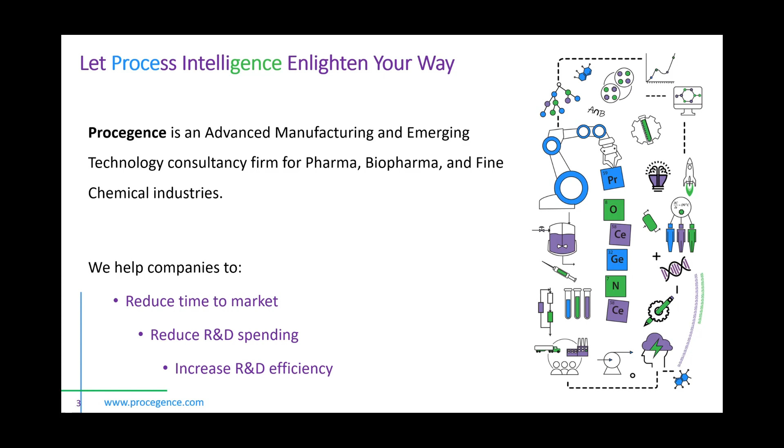We have done many projects, many scales, many types of clients - drug substance, drug product, biologic, small molecule, fine chemical, devices. So spray drying, crystallization, flow chemistry, process development devices - many different types of projects.

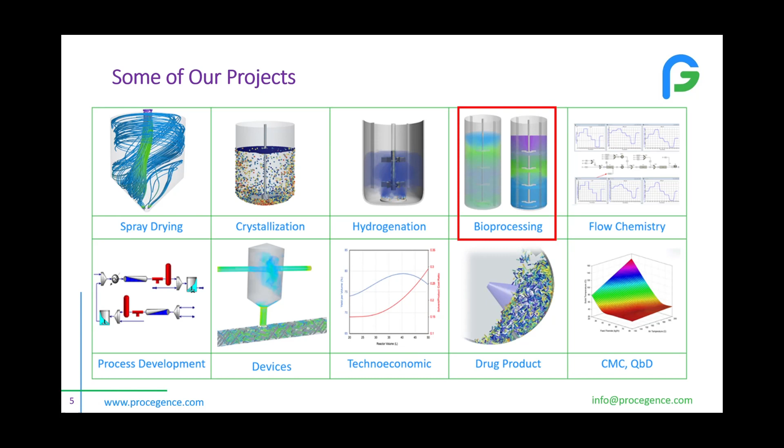If you are interested, you can refer to our website or our LinkedIn page, or email us directly at info@prostagence.com, so we can set up a quick meeting and show you how we work and how we could help you with your projects. For the purpose of this webinar, I'm focusing on bioprocessing and showing you the scale up of this bioprocessing equipment from the lab scale to very large scale manufacturing in a very rapid way.

What are the multiphase gas solid liquid reactors? What are the types and applications? In bioprocessing, we have fermentation, for example, in biopharma, wastewater treatments. In chemical synthesis, there are hydrogenation, ozonolysis, petroleum and refineries, fluid catalytic cracking, Fischer-Tropsch reaction, or in the food industry. So these types of reactors are everywhere at different sizes and designs and applications.

However, they are very complex, so the transport phenomena - heat, mass, and momentum or mixing - are scale dependent. So we have a gas bubble. In the bioreactor, the gas would be air or oxygen. In hydrogenation, it could be like hydrogen gas. We have a liquid medium, which in bioprocessing would be the bioreactor medium, or in chemical synthesis like hydrogenation, it could be methanol or the solvent we are using for the hydrogenation reaction. We would have the solid, such as cells or the catalyst for the hydrogenation, where we would have mass transfer and heat transfer.

For example, here you can see some examples of oxygen transfer from the gas bubbles. It's a flux from the surface area of the gas bubble to the liquid, and diffusing through the liquid, going to the solid. If it is going to be a cell, diffusing through the cell, going inside the cell, doing all the metabolic activity of the cells, and then secreting the product or the CO2, which then should be stripped away by the gas bubbles out to the environment.

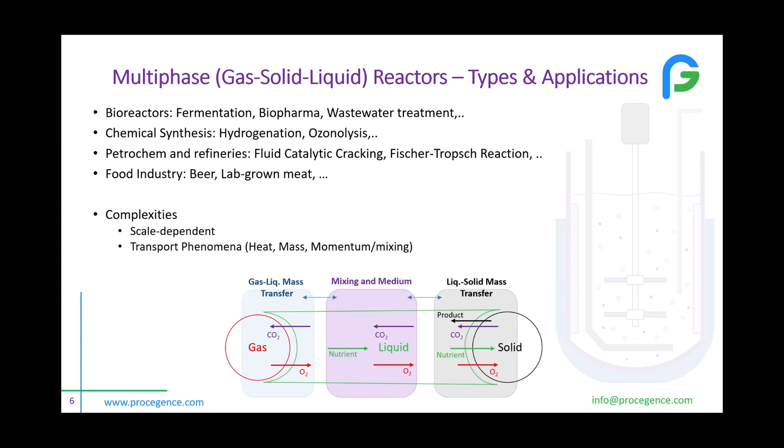As an example of the components for the bioreactor or the hydrogenator, these are typical lab scale, pilot plant, or manufacturing scale reactors. We would have the vessel, the container, which could be of different sizes, geometries and designs. We might have different baffles of different sizes and locations.

The mixing elements could again be different sizes, numbers, angles, types. We would have some probes for pH, temperature, concentration, and different PATs that we need in the system to control and monitor the bioreactor or hydrogenator reactors.

Gas supply, mostly through a sparger. The sparger would have different types of designs. It could be a star shape, a ring, or perforated plates. Every vendor has their own design, with different advantages and disadvantages.

Heat transfer, through a thermal coil inside the reactor, or a thermal jacket on the outer layer of the reactor.

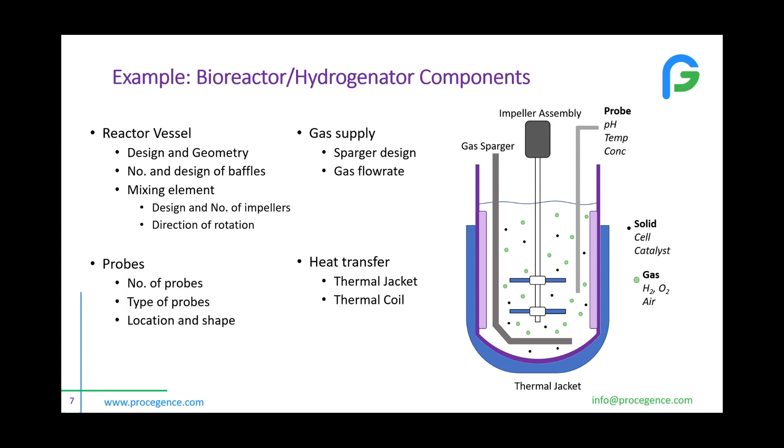The continuum of knowledge we need to have from the lab to manufacturing is always working hand in hand with the scientist, operator, and technician from the lab, and the biologist and chemist, all the way to manufacturing, to the engineers, to the management. We are working together on capturing all the knowledge from the chemistry, from the biology, to the equipment, to the plant and the process in one synchronized way.

The parameter estimation, or the knowledge of the chemistry or biology, was mostly defined by the chemist and the biologist. We would have some validation and get some parameters from the lab scale. For example, how would the cell behavior be at different shear rates, or the metabolic cycle for the cells in the lab scale.

Then we go for a scale up. This is mostly our work, shown here as the process between the lab scale and the optimized process, so we can design and have some parametric study to find the best scale and condition that we should run for an optimized space.

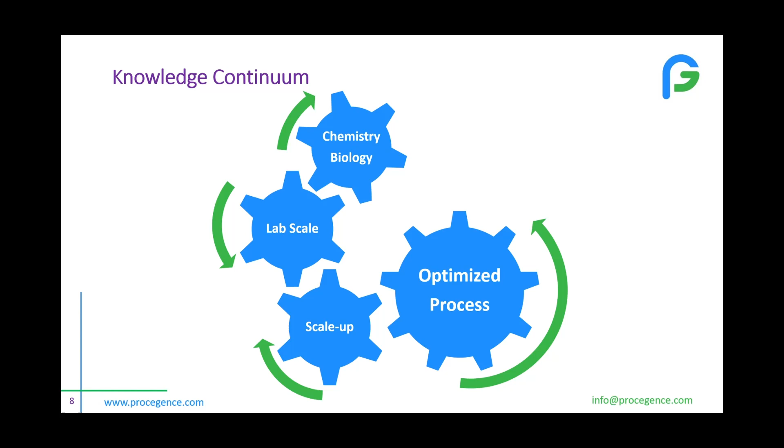In terms of scale-up challenges, most of the time the equipment, depending on manufacturing or the plants, is very costly and time-consuming. When we sit at the lab scale, we are working with 100 milliliter up to 1 liter, 20 liter bioreactors. Here you can see small vials all the way to these rocking chair kind of bags.

The processes are long, mostly like 3 weeks. Operation cost is still manageable because we are running at a very small scale. We have multiple options for different designs and equipment, so we can change the shape of the flasks or the impeller - in the lab scale it's still affordable to do.

However, when we go to manufacturing, now we are talking about 20,000 or 200,000 liter bioreactors. The time is still the same because it's independent of scale, defined by the cell behavior, but the operation cost is hugely different. We have this huge bioreactor which needs a lot of media, GMP time,

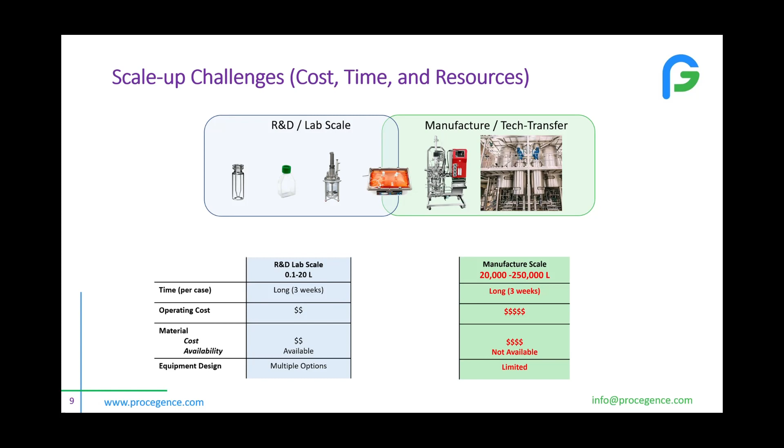utilities, everything that makes this process very very expensive. And most of the time the equipment is fixed, right? There's existing equipment that we have to retrofit our new chemistry or new biology into, so we don't have much availability or degree of freedom to change different parameters or the design or shape of the bioreactor.

So, mentioning the non-linearity in scale: when we are moving from 100 milliliter to a 200,000 liter reactor, you can see the volume is 200,000 times larger, but the RPM of the mixer or mixing element couldn't be that much faster. So sometimes we even go with slower RPM. For example, in the lab scale, if you're running at 200, 300 RPM, that's very high for the manufacturing scale, because of shaking, vibration, and the power needed for the motor.

So we normally go for 100, or like 60, or maximum 200 RPM to have good mixing and affordable power and cost. However, the gas rate would be like 100, right? So having a lot of gas causes flooding, and also a lot of cost for pumping and maintaining asset utilization for the bioreactor. You can see this kind of nonlinearity - the volume goes 200 times larger, but the gas rate is like 100.

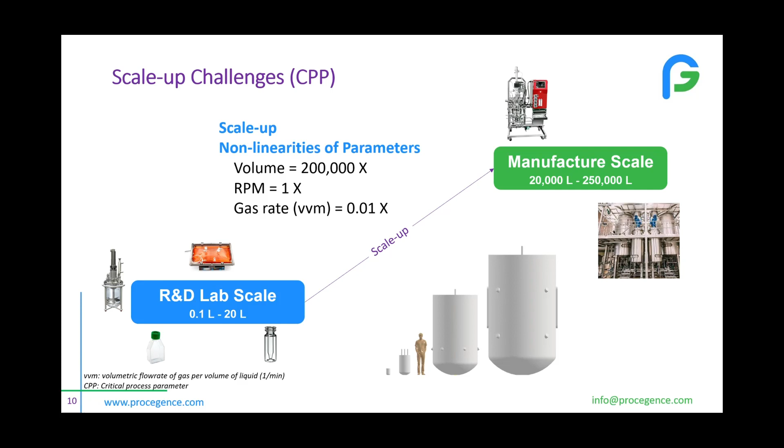These are some parameters that we have to explore during the scale up, and the scale up is not a dilation, right? So we don't times everything by 10 or a factor of 100 - we need to capture all these non-linearities by simulations and modeling, which would be a very efficient way to do that instead of running experiments in the lab, which for these kind of large systems and long processes would be impossible.

The framework we propose here is a digital transformation or digital twin. We start from ideation at the lab scale, something we can manage through the lab, running multiple experiments in a transient mode. I mean by simulation, trying different parameters, different scenarios, different sensitivity analyses, and finding the best condition that would work for our cells.

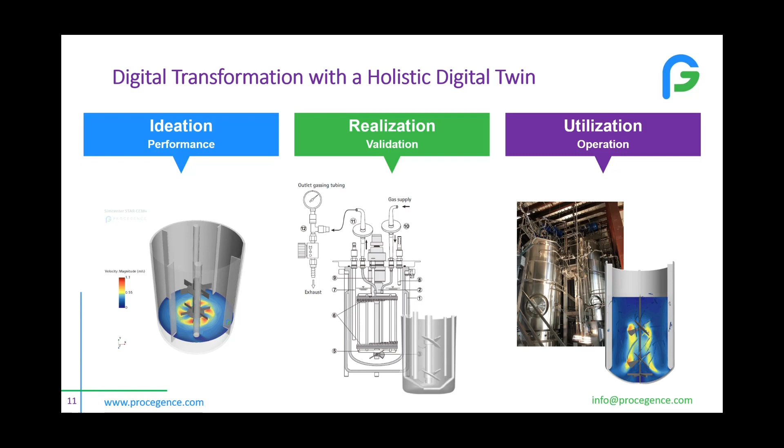It's scaled at the lab scale, so it's affordable and possible to do validation in the lab scale with a 1 liter, 2 liter bioreactor. Then, when we have confidence that our model is validated and verified, something we can rely on for scale up, we go for scale up and optimization of the bioreactor, but just by simulation, to very large scales.

I mentioned digital twin, and you might have heard this term quite often these years. That's nothing new, this has been around for almost more than 20 years now. There are different levels of the digital twin.

Starting from the core of the system, which is a representation of the chemistry or biology by equations and models, going to the equipment model, which is what we're going to focus on today with the bioreactor itself. Then to the process model, where we need one-way data from the SCADA system. Or if we want to use this digital twin for process control, we need two-way communication: getting data from the process or the plant, then overriding the control loops and changing parameters to have the real digital twin as a holistic approach covering everything.

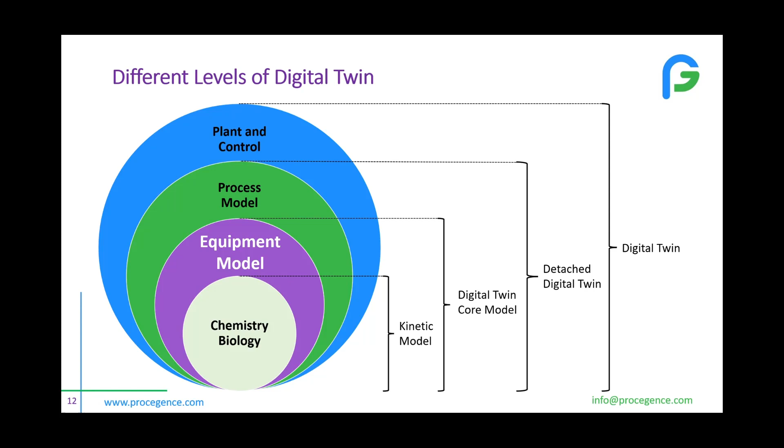So for the purpose of this webinar, I'm going to focus more on just the equipment model as the core of the digital twin, and we're going to see what the implications would be.

I mentioned cell biology, or even reaction kinetics, is the core knowledge we have to capture through our collaboration with our chemist and biologist colleagues. The kinetic model characterizes the system, including the limits: how the cell behaves, what the high limits and low limits are.

For example, if we increase the shear rate with very vigorous mixing, are we going to damage the cells? Are we going to rupture them, squeezing them and putting a lot of stress on them? Or on the lower limit, if we have limited mass transfer or oxygen transfer from the bubble gas to the liquid to the cells, are we going to have starvation? The cells cannot breathe very well, and they cannot go through optimized biologic cycles, so some of them would die, or instead of an aerobic process, they go to a fermentation process.

So there are low limits and high limits that define our design space. If we stay in the center of these, balancing everything, it would be the healthiest and most favorable condition for our cells, or even for the biochemistry.

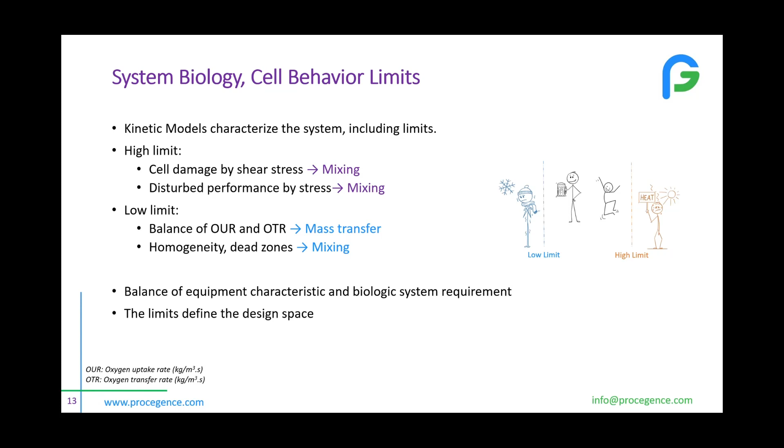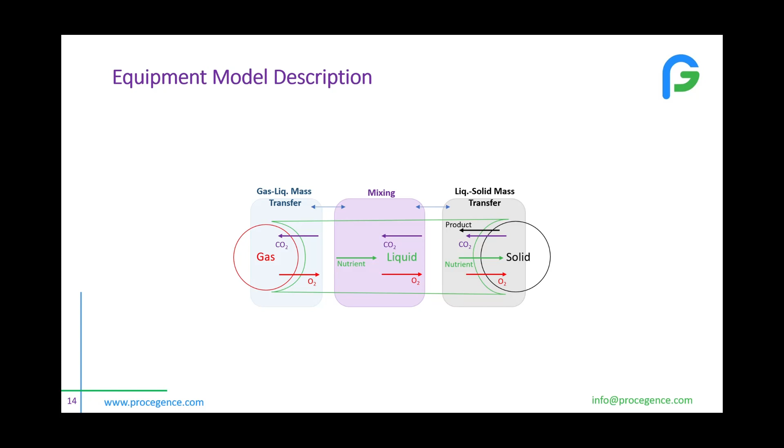Now we're getting to the simulation and modeling of the transport phenomena at the interface and through the liquid. There are different parameters impacting this transport phenomena. At the gas-liquid interface, we have the shear and mixing impact, the medium impact, and the sparger: the design of the equipment, the working volume, the impeller design. On the medium side, we have the pH, the properties of the liquid, temperature, and dissolved oxygen saturation level, among other information.

On the sparger, it's about how the sparger is designed, how we make the bubbles, the number of bubbles we're making, and their sizes. As you know, mass transfer for smaller bubbles is faster, since the rate is a flux, a mass transfer per surface area. So when we have smaller bubbles and more of them, we get a higher overall mass transfer rate.

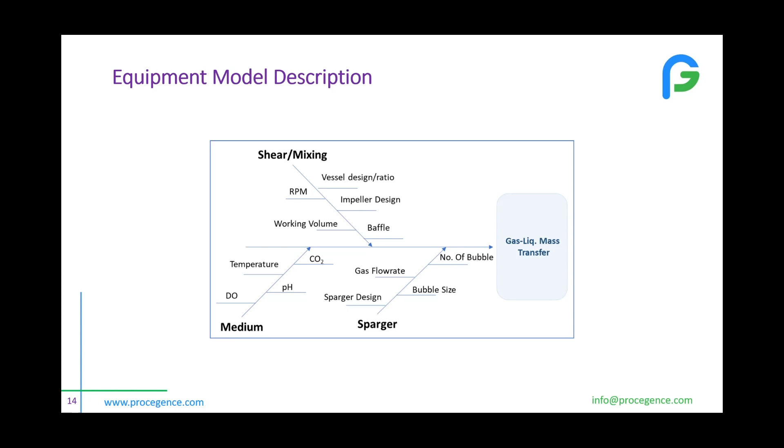Through the liquid, by mixing, we have the vessel design, medium, and shear design impacts. On the medium, it could be like viscosity and density of the liquid. For the shear rate and the mixing, what is the RPM of the impeller, the working volume of liquid we have in the vessel, energy dissipation and the diffusivity.

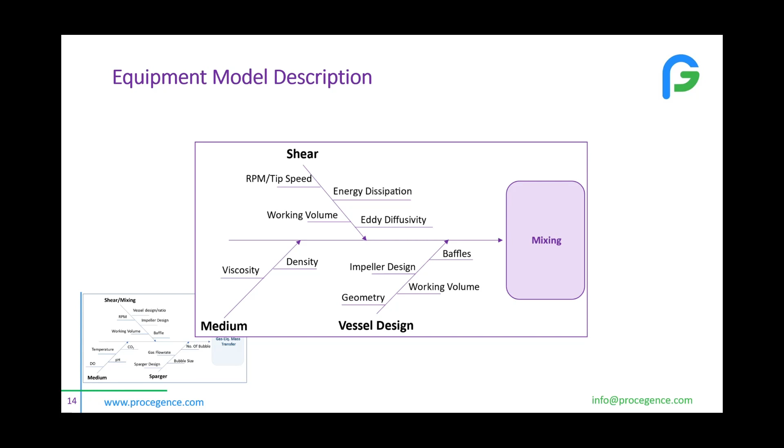And then we go to the vessel design: number of baffles, types, and working volume, geometry of the vessel. Is it a tall and skinny, or a short and chubby vessel? All of this impacts the energy dissipation and the diffusion length, which impacts the mass transfer and the diffusivities.

At the liquid-to-solid mass transfer level, we have the cell biology, from the omics to oxygen uptake rates, size and dispersion of the cells through the liquid. On the medium, we have density and viscosity, saturation level of oxygen or CO2, the impact of shear, the mass transfer boundary layer, and the working volume defined by the mixer. These are all interconnected and impacting each other.

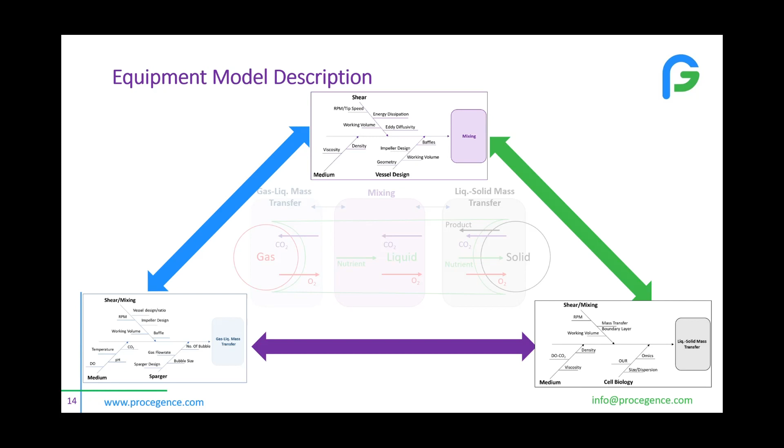For example, you can see mixing is repeating almost everywhere for all these three steps. We need to solve all these equations and run the simulations in a synchronized way, considering all the parameters, equations, and transport phenomena at the different stages and levels.

This sounds easy, but it's actually very complicated when going through the simulations, starting from the parameter estimation. Important information to capture from the chemistry or biology is the cell behavior, the systems biology, how the system behaves under different shear, different temperature, different pH.

These parameters are not easy to capture, and the biologists and chemists have their own way to do parameter estimation for those core equations that we have to put into the simulations.

Equipment blueprints, CAD designs, geometry and measurements are easier to obtain when working with clients. If it's a new or relatively new design, they would have engineering blueprints they could send to us, or we just need measurements using a measuring tape and one operator.

Sometimes when the reactor is open, they do the measurement and a hand drawing for us. Then we can convert it to CAD for the simulations in our simulation systems.

Computational resources on our side can become very expensive when running a multi-parametric study with high fidelity simulations. So we have to go to high performance computers, HPCs, to the cloud, getting a lot of CPUs or GPUs to run these expensive simulations over multiple days.

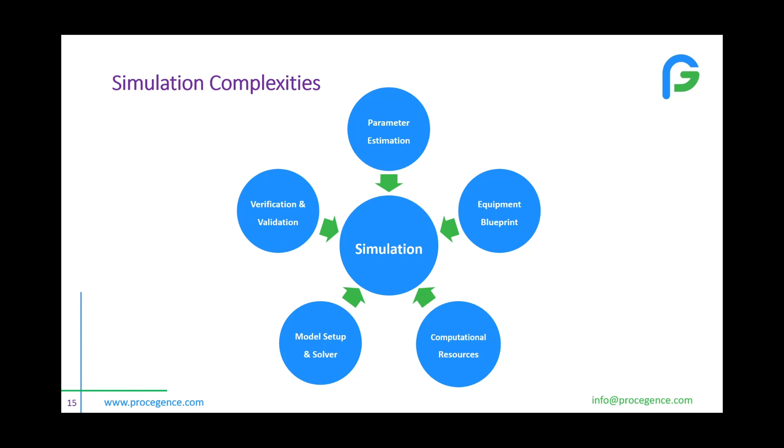Then for validation, we do it with experimental data at lab scale. Jorge is going to show our workflow here, how it works, and then we get the validated simulation that could be implemented into industrial scale applications.

And now I'm handing over to Jorge to present the bioreactor scale-up. This was an industrial scale bioreactor, and he's going to show, from the simulation side, all the way to the application and optimization of the bioreactor.

So I'm going to be talking about the actual case study of the bioreactor scale-up.

So this is the project that we were working on. We started from a bioreactor in a lab scale of 100 milliliters, and we wanted to scale it up into a manufacturer scale of 20,000 liters. Here you have for your reference the dimensions and the characteristics of each of the two scales.

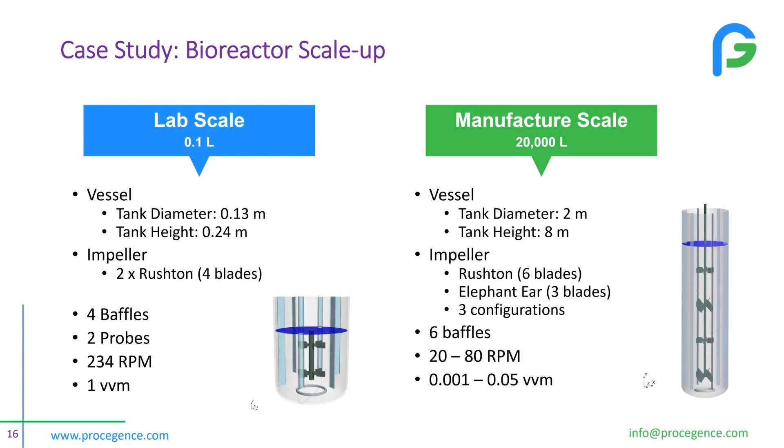But before we jump into the actual results and see how we did the scale-up, we want to talk a little bit about the mass transfer and the modeling of the microorganisms. When we talk about mass transfer from oxygen to liquid, we included the model of the oxygen mass transfer by dissolution, and the dissolution is driven by this equation right here.

If you see this equation in a graphical way, this is what you get, which is basically the change of the concentration of oxygen in time, and how fast the concentration of liquid reached to a saturation is basically the KLA. The higher the KLA, the faster you're gonna get to that saturation level.

Now, when we take a closer look into the equation, we see that it depends on a few different important parameters. The first one is the A, which is basically the area for mass transfer, which is related to the bubble size and to the number of bubbles. The second one is the saturation oxygen level, which is related to the dissolved oxygen, the medium saturation at that particular condition.

And what is the oxygen uptake rate, basically how much oxygen our microorganisms are uptaking for their metabolism, and the OTR, which is basically how fast are we transferring the oxygen from the gas phase into the liquid phase.

Now the concentration level is provided as the equilibrium oxygen concentration, and we can obtain that from Henry's law coupled with the oxygen uptake rate. But what we want to find and what we want to optimize is the KLA, basically the mass transfer coefficient.

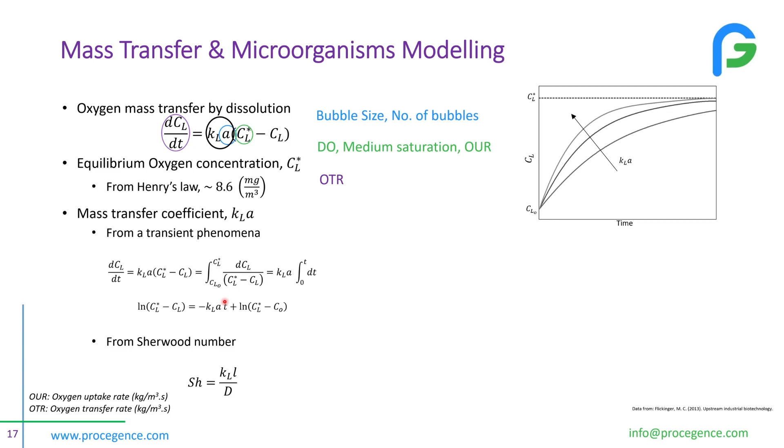The other way that you can calculate the KLA is using some dimensionless parameters, for example, the Sherwood number. So that's the modeling configuration from the mass transfer from the gas and liquid.

But if we talk now about the microorganism modeling, we need to take a few considerations. The first one is that we need to define what is the oxygen uptake rate of the biosystem that we have in our reactor. Here you have some specific OUR for different bioorganisms: bacteria, yeast, or molds.

Now this is going to be dependent on a viable cell density that you want to have or you currently have in your bioreactor. And we're going to see how this looks in the results of the optimization later in the slides.

The second thing that you need to take into account is the environmental stress that we are inputting into the organisms. Because we have a mixing element, we're going to have some environmental stress driven by the impeller, and it's going to be affecting the health and the metabolism of the microorganism. You also need to consider the pH, the temperature change, all of this in the omics of the microorganisms.

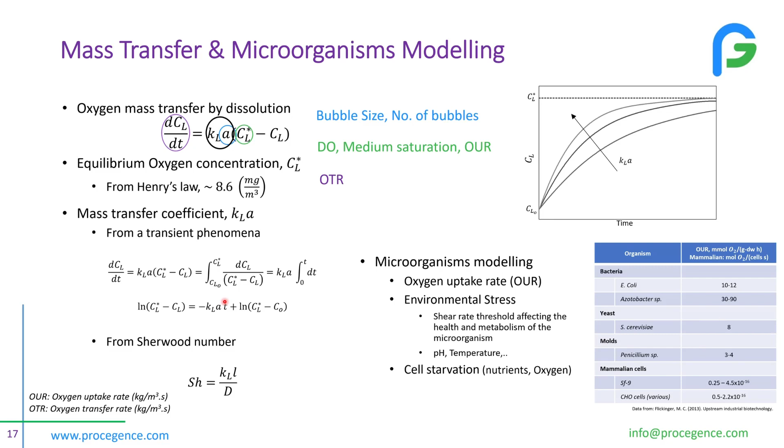So we took all of that and we built a CFD simulation to solve this issue. The workflow of this simulation we divided into three different steps. Step one was basically simulate the actual case that we have in the lab scale where we have some experimental data for validation.

So we built these steps and we start with this step because that's the way that we can validate our CFD model with the experimental data that we have. It allows us to fit and to estimate some parameters needed in the simulation and to explore the cell behavior limits.

So this simulation that we built up for this step was a transient simulation, because we had the data of the dissolved oxygen in time, and the simulation that we ran was from the lab scale bioreactor. We did a symmetry, or we simulated half the bioreactor, because the tank was symmetric.

Now step two, we still are in the lab scale, but we want to convert the transient simulation into a steady state simulation.

The reason why we wanted to do this is to save computational resources, because a transient simulation is a really time consuming type of simulation. If we could, instead of running a transient, run a steady state model, it's going to be way faster, and when we do the scale up, it's going to be much faster and easier for us. Then we're going to validate the steady state simulation with the transient simulation and with the experimental data, and that's going to be our base case scenario for the scale up and for the manufacture scale.

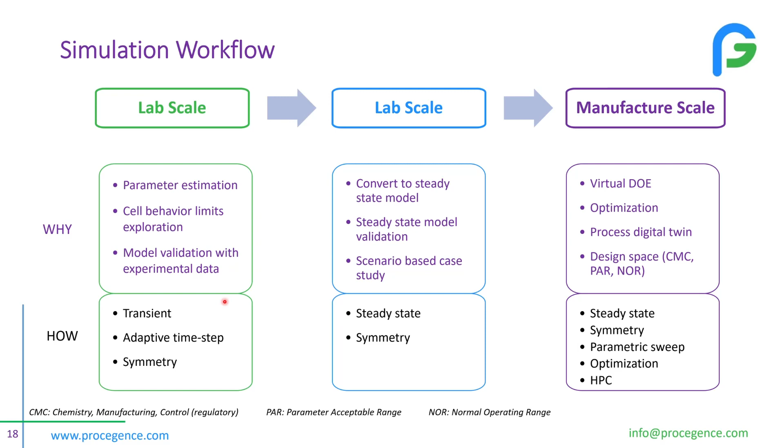So overall, we have a similar mass transfer rate. We have a couple of differences, and those differences might be attributed to, first, an error in the experimental measurement of the dissolved oxygen, and second, an overshoot in the mass transfer in the CFD code due to the bubble size distribution. Remember that I told you that we had to fit some parameters for the bubble size distribution - that error may be coming from that fitting process, but the overall error is less than 10%, which is pretty acceptable. Now that's step one in the workflow.

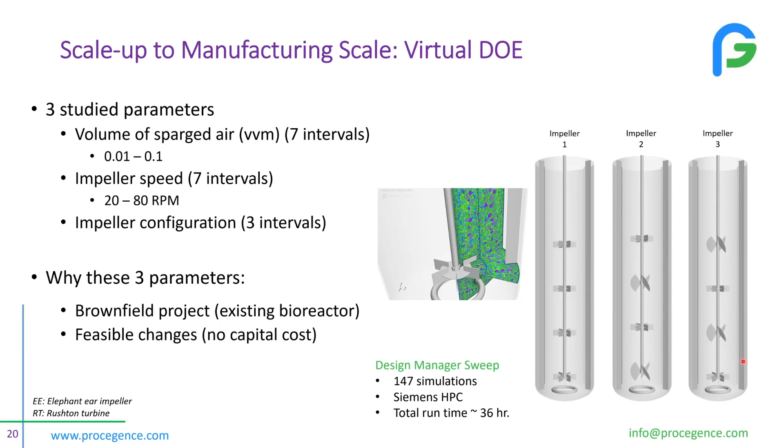So for the virtual DOE, we ran 147 simulations, which is the combination of all of the combinations of the 3 parameters, and we ran the simulation in the Siemens HPC with a total runtime of 36 hours. Now these are the results of the virtual DOE.

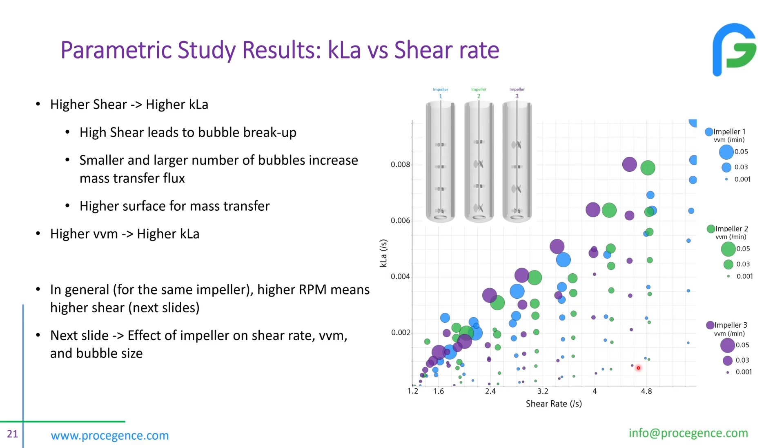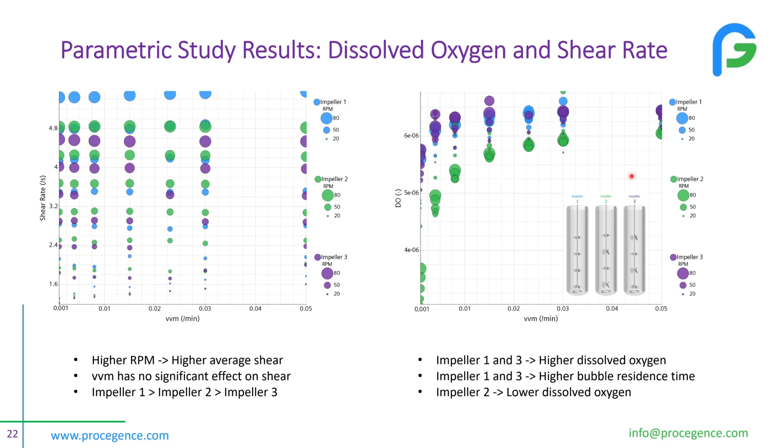And this is going to be important in the next slide when we talk about the bubble distribution. And when we talk about the dissolved oxygen, you see that impeller 1 and 3 have a higher level of dissolved oxygen compared to impeller 2, and this is also related to the bubble size and the bubble residence time.

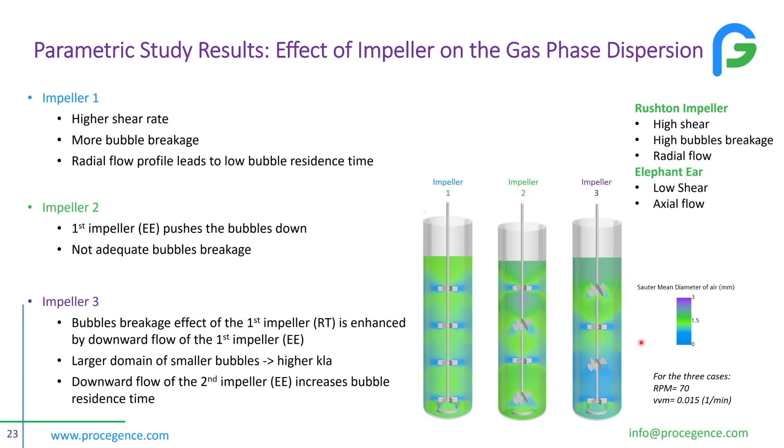Impeller 3, on the other hand, when bubbles are injected into the system, they are broken down by the first Rushton impeller, and then the first elephant ear pushes down the bubbles, enhancing the bubble breakup of the first impeller. So we have a high region of smaller bubbles and a higher concentration of bubbles, which leads to a higher KLA. Now the downward flow of these two impellers, the elephant ear, increases the bubble residence time, which is also increasing the mass transfer for that particular configuration.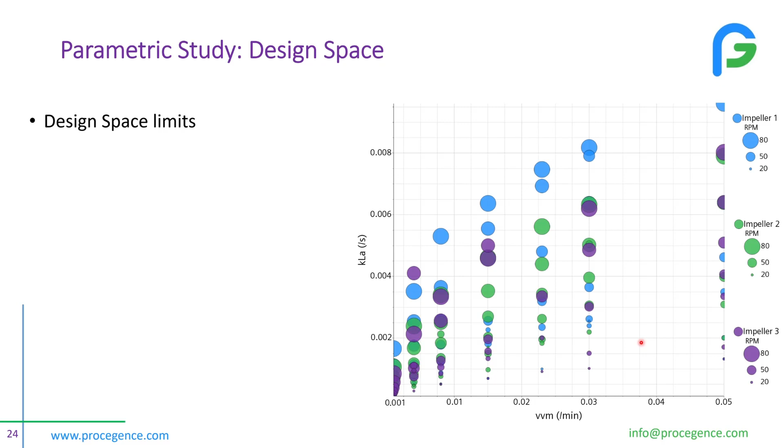But from this virtual DOE, what we wanted was to explore the limits of the design space. So in theory, you can run the bioreactor in any specific configuration that you want, at any RPM, at any VVM. But in reality you have some limits on where you can operate the bioreactor, and this is what we obtain doing this virtual DOE.

For example, if you operate the bioreactor in this region here, you're going to have cell starvation. Basically, you're not going to have enough mass transfer for the biologic performance. So you're going to have insufficient OTR for the OUR that you have.

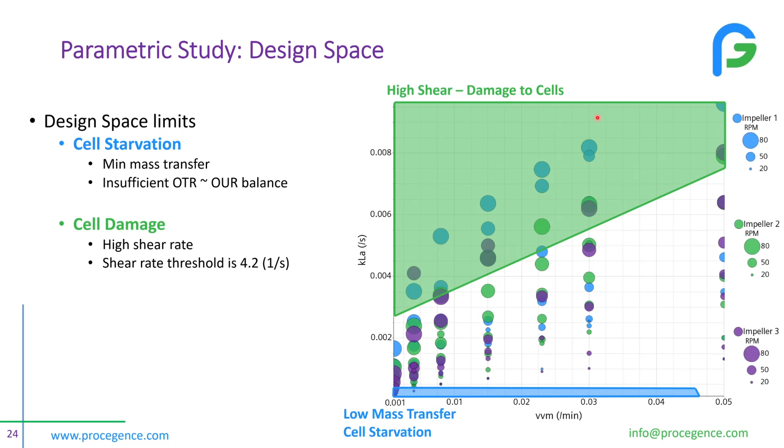If you operate the bioreactor in this region, you're going to have a high shear region in the bioreactor, which is going to damage your cells. And we can define a threshold of what is the maximum shear rate that we can get in the bioreactor for the operation of the reactor itself.

And if you operate in this region here, you have a higher power consumption because you have higher RPM, meaning higher electricity in the electromotor. You have higher gas compressor and conditioning of the gas. So this is unfeasible from an operating point of view because it is a high power consumption.

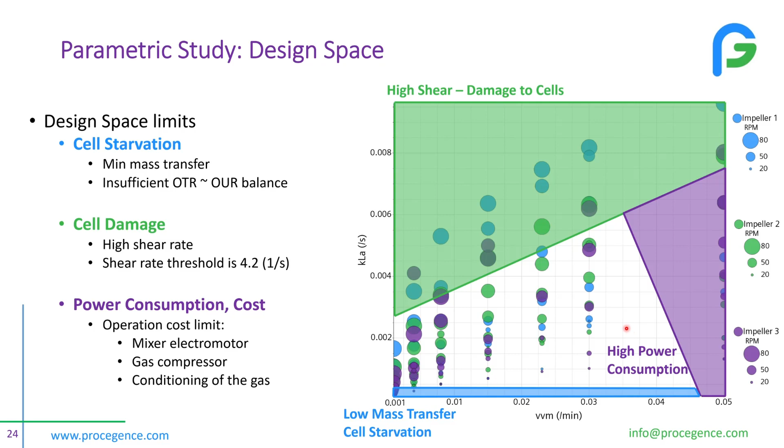So we can create this region here where we can operate the bioreactor, and now we want to find what is the optimal condition to run within those limits. And this is what we did by setting up the optimization study.

So the goal was to maximize the KLA, and we have some constraint, which is the average shear rate as we saw in the previous slide. Now, what we want to get is the optimum condition, basically what is the best combination of all of the tested parameters. But we also want to find the local optimum, which is basically what is the next best case in case we cannot run the global optimum because we have some equipment, process, or other limits or change.

So we kept the three study parameters, VVM, RPM, and the impeller configuration, within those limits that we defined in the previous slide. And we ran an optimization study where we tested 200 different combinations using the Sherpa algorithm for the optimization on a Siemens HPC with a runtime of 72 hours.

And this is basically the history of the optimization study that we conducted. Each point in the graph represents one simulation that we tested, and they can be either feasible or unfeasible. Feasible meaning that they satisfy the constraint that we set, and unfeasible meaning they don't satisfy the constraint. And we found a global optimum and local optimums.

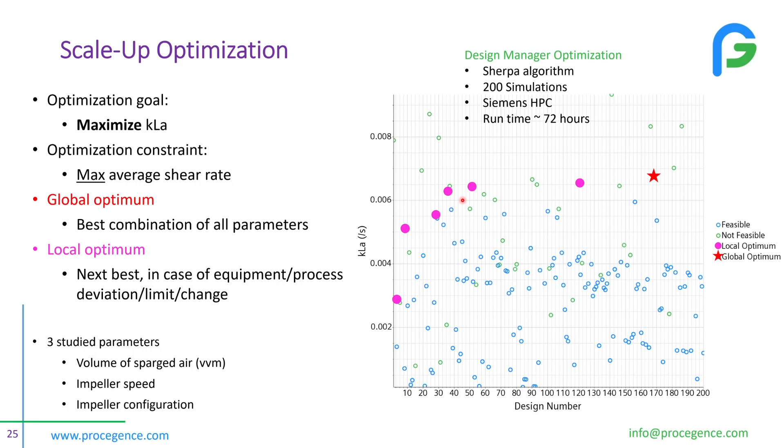Now, when you run this type of optimization study, you can create these types of optimization dashboards, which is a visual way of understanding your optimization study. You can combine plots, widgets, different tools to make informed decisions.

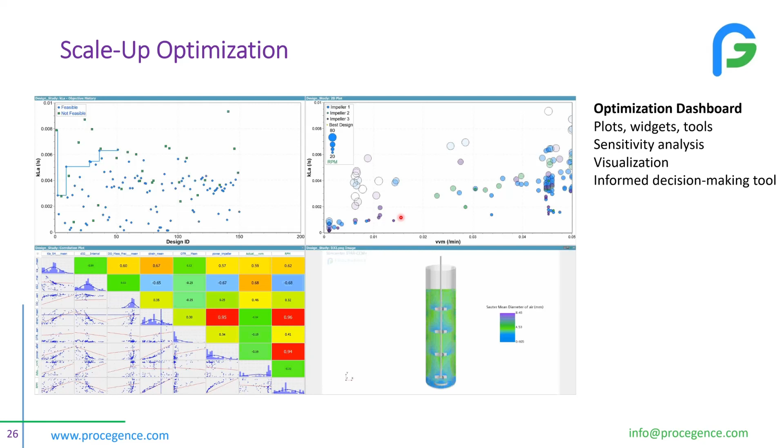But what I want you to take a closer look at is this plot here on the lower left, which is a correlation plot. In there we can see different correlations of variables and responses in our system. So we can see some apparent correlations, something that we already know beforehand, which is the correlation between RPM and the power, or the RPM and the shear rate.

The higher the RPM, the higher the power consumption; the higher the RPM, the higher the shear rate. But we can find some additional correlations that we may not be aware of before we start setting up this study. For example, the correlation between RPM and mean diameter of the bubble, shear rate and KLA, and shear rate and OTR. So with this type of optimization study, and using this dashboard, you can build knowledge of the operation of the bioreactor, because you are finding correlations of variables that you may not know beforehand.

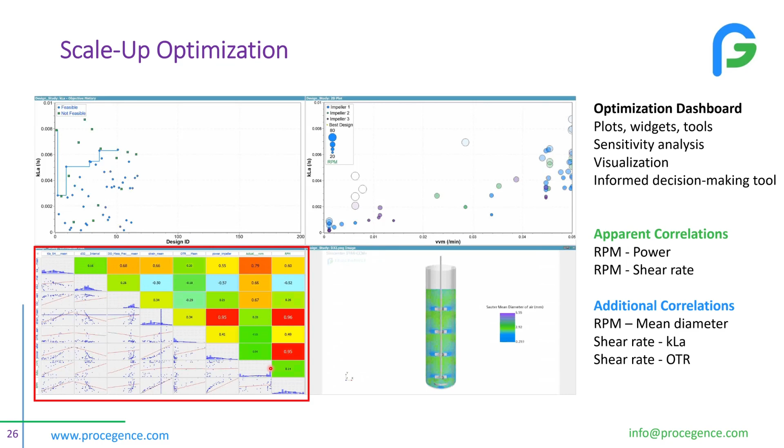Now, all of the results that I have shown to you here are from the mass transfer from the gas to the liquid, but we haven't talked about the modeling of the microorganism and the cell biology. So remember that when we talk about the modeling, we have a balance between OTR, basically how much oxygen we are providing by the gas, and the OUR, which is how much the cells are consuming.

So for this biologic system that we had, the specific OUR was around 12 millimole of oxygen per gram per hour. And for the viable cell density that we had in this case, the OUR was around 1.25 times 10 to the power of minus 7 kilogram of oxygen per meter cubic second, which is this line here.

Now this plot is telling you, in all of the tested cases that we had, what was the OTR - basically how much gas we provided in the mass transfer from the gas to the liquid - and we have the balance between OTR and OUR.

So if in a simulation or a case you have an OTR which is less than the OUR limit, you're in this region here, and you're going to have cell starvation. You're not providing enough oxygen into the liquid for the proper cell biology, so your concentration of cells is going to decrease. And since this is a self-regulated biosystem, you're going to have a new cell density and a new OUR - basically you're going to lower this limit until it matches what you can provide, because it's regulated.

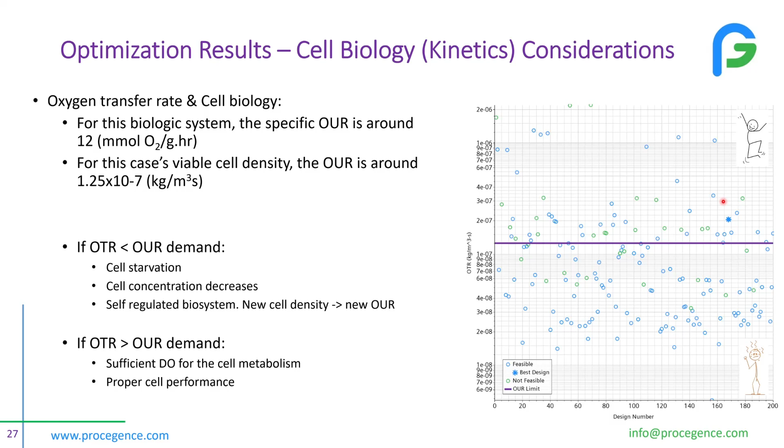But if in your case you have an OTR higher than the OUR, you have sufficient dissolved oxygen for the cell metabolism, so you're going to have proper cell performance. This case here, this star, is the case that we found to be our global optimum, where the OTR was higher than the OUR, so we know for a fact that we're going to have sufficient DO for the cell metabolism. And here you have just the description of what was the best scenario that we found.

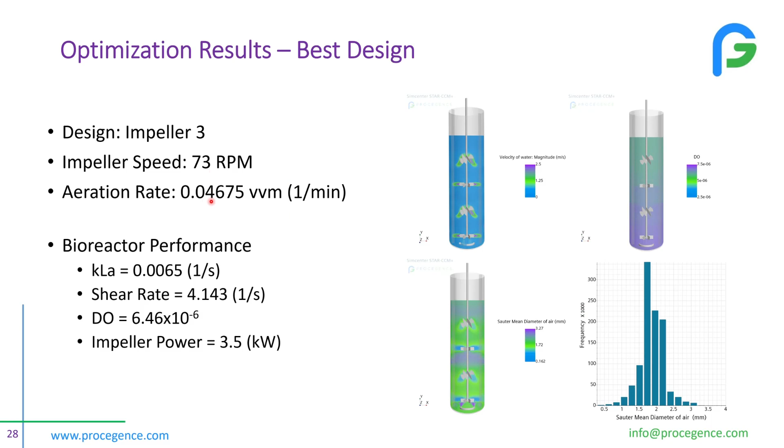But the additional benefit of an optimization study is not just to find what is the best case and the best condition to run your bioreactor. We're basically creating a lifetime value of process knowledge, because we are finding variable correlations that we may not know beforehand, and we're finding the global optimum and the best designs that we can test and run.

And by doing this, we can increase the yield, the throughput, and the profitability by lowering and reducing the operating cost, the downtime, and the cycle time.

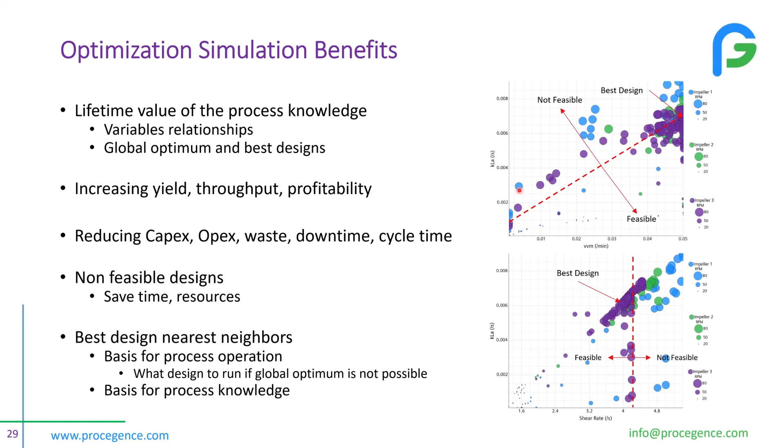So you're building that process knowledge, not just finding the optimum condition. And we can keep extending this benefit by compiling all of these results of the model of the equipment and create a digital twin core model.

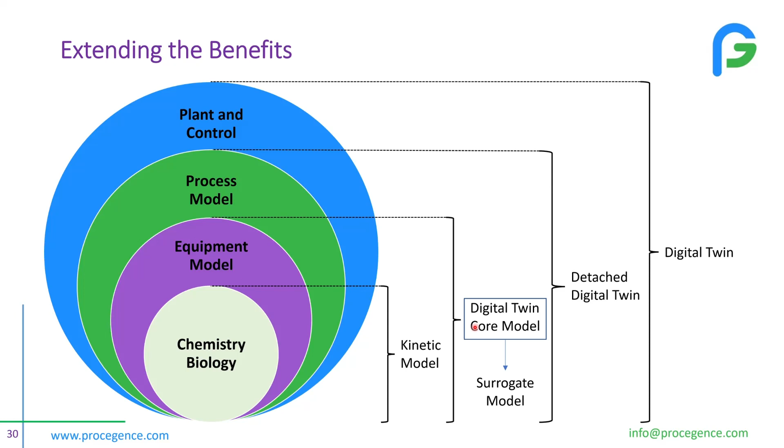We can do this by creating a surrogate model - basically a digital twin of your unit operation, which you can couple with the digital twin of your virtual plant. The good thing about this digital twin and compiling of results is that you're creating a lifetime equipment model that you can use for quick evaluation of system performance, for advanced process control, and you can plug these tools into different codes, so you can couple live data, control, and optimization into a physical plant digital twin.

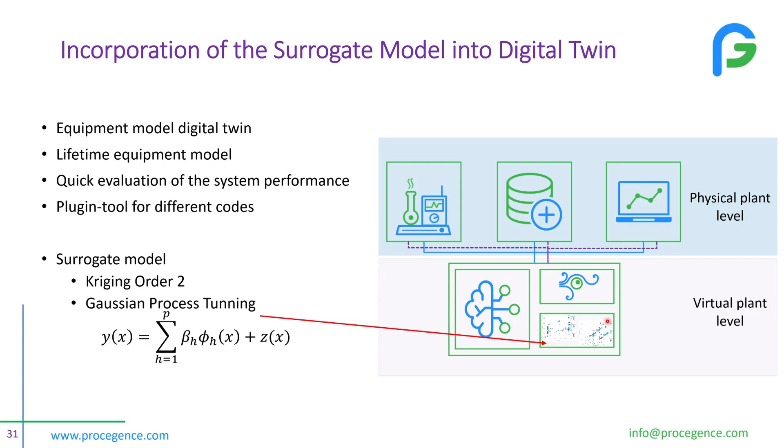We're not going to go too deep into this topic, but be on the lookout for a future webinar where we'll talk about the plant-wide digital twin and how this model of a unit operation couples with the whole digital twin of the plant.

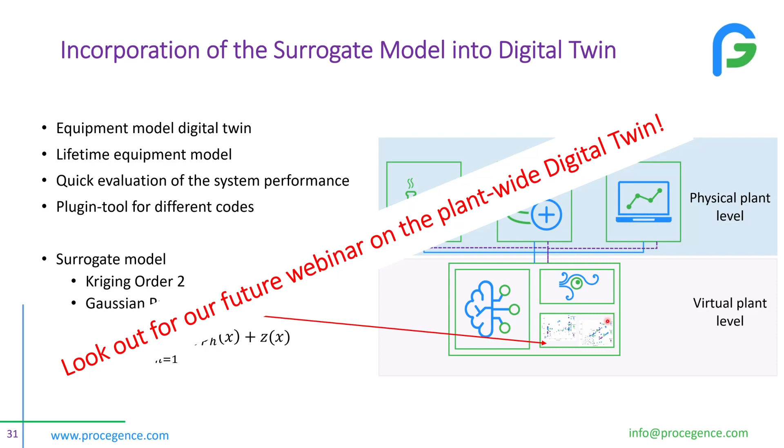And this concludes this webinar.